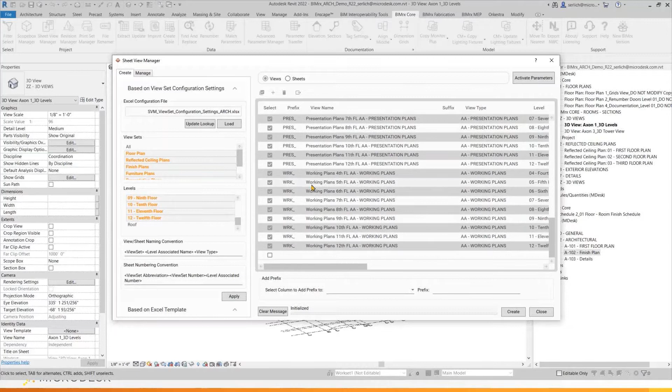Once we hit apply, we'll see that the data grid will update with all of that information. This will allow us to set up all our views, from the floor plans, the RCPs, furniture plans, and working plans. It is all done so easily. Lastly, we will select to create, and you'll see how in just a few seconds, a little over 50 plans have been created, and all that project setup is done for us.

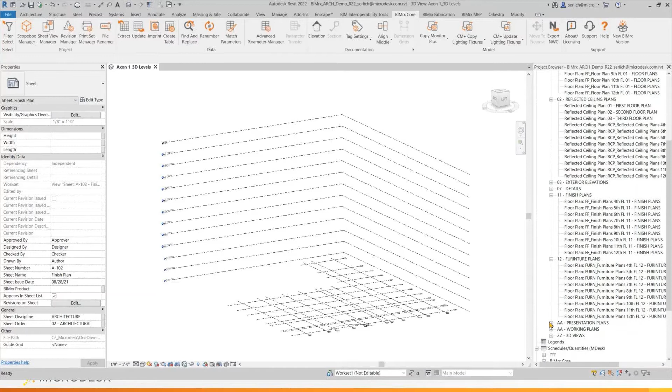You can see all the views that I now need are in my project browser. My floor plans, RCPs, finish plans, furniture plans, presentation plans, and working plans are all here. And now that we've set up all our project views, we can start to model all of the elements within our building.

Let's fast forward through time to a point when our building is modeled, just like that. I mean, I wish BIMrx had a button to do that, but we still need to model it ourselves. But once we have our modeling portion done, we can begin that tedious task of updating the data of our model elements. Managing data is such a repetitive process within Revit.

You must select each element and input all of that parametric information. And Revit makes this process a little bit easier by allowing us to create schedules, but it's still so tedious to update that data. Now, I just showed you how to create our views within our project utilizing Excel. But let's take a look at how we manage our parametric data.

The BIMrx extract and update features allow for round-trip data between Revit and Excel. Before I extract and update the elements, I must first select the elements I want. For this example, we want to update some room parameters, and we will use the BIMrx filter select to do just that. Here, we are able to easily select elements based off of our Revit rule-based filters.

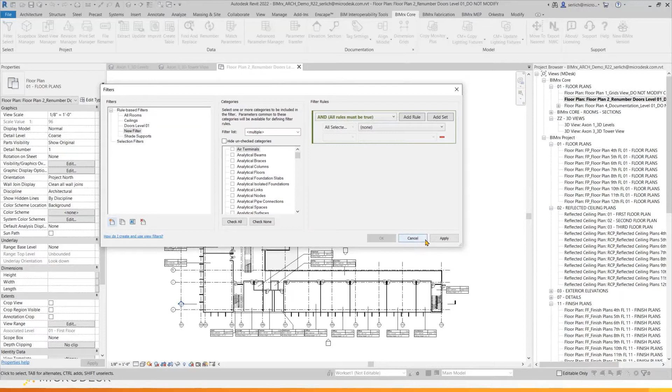This takes selecting elements to a whole new level. We can also access the Revit out-of-the-box filter dialog if we need to create new filters. Then we can set up our rule-based filters to select and hide, or select and isolate those elements.

Now, once we have our rooms selected, we can come over and use the BIMrx extract feature. With BIMrx extract, we can either extract a selection of elements or any pre-created Revit schedule. For this example, we will extract our selection.

When extracting a selection, we can now preview which parameters we want extracted right here. By default, it will export all parameters associated to the elements of my selection. But we can use our parameter filter, as you see, to specify which parameters we want extracted. With the parameter filter, we have the ability to really narrow down which specific parameters we want.

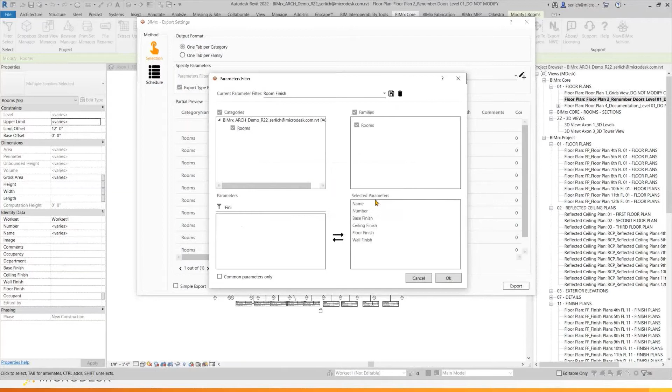And here we want to extract all our room names, numbers, and the different finishes. We can then save this filter to use at a later point in time. Once we save it, the preview will then update according to the changes that we have made. Once we are happy with this preview, we can select to create a simple export.

This will only export the type and instance parameters that we've specified. Then we can hit export. It'll prompt us to save the file. And then prompt me to open that file.

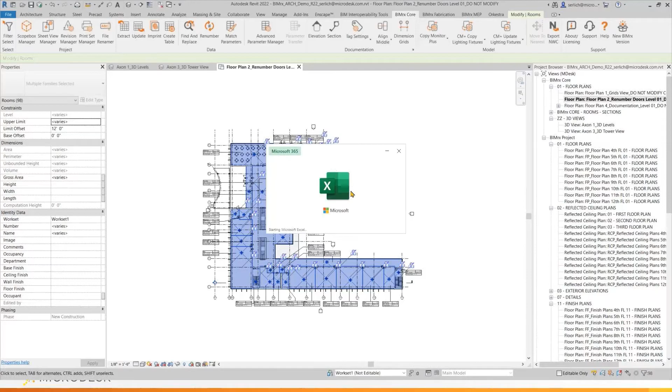Now, once that file is open, we can start inputting that information in. Now, in reality, we would probably take some time to make these changes more appropriate, but for the ease of this demo, let's just input some data.

Not only is this really easy for us Revit users to update the information, but now we can coordinate with non-Revit users alike. I'm certain that many of you have team members who aren't working in Revit. Well, now we can export this Excel file, hand it over to our consultants or other project team members who aren't in Revit. They can fill out the Excel file, bring it back to us, and we can easily bring it back into the Revit model.

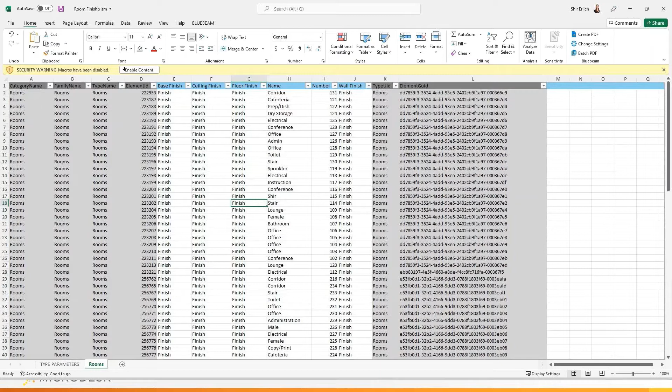All we have to do is save the file, come back to Revit. Let's open up first a schedule so we can see this data when it is updated. Now we can use our BIMrx update feature, select the correct Excel file, and simply hit update. And just like that, all our room data has been updated. It is so fast and easy.

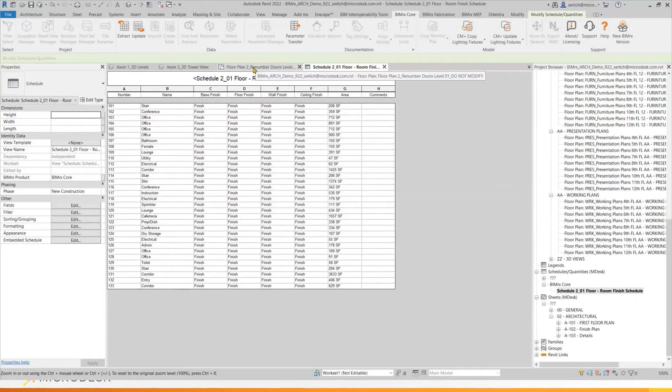Not only are there commands and features that work to update parametric information through Excel, but BIMrx has a few commands and features that work to update parameters directly within our Revit model. For example, we have our brand new match parameter feature that allows us to match instance parameters across different families or elements. The Revit out-of-the-box match parameter only matches types, but now with BIMrx, we can match instance parameters as well.

For example, I can add a value to the comments parameter in this furniture element, then select the BIMrx match parameter command. Simply select the element with the value that I want and all the elements that I want to match that value to.

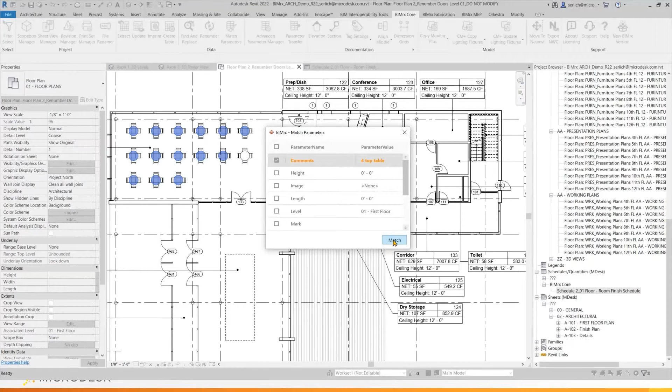Then I simply select which parameter I want to match and select match. Now all my elements will have the same value for that parameter. This makes copying values across different elements so easy.

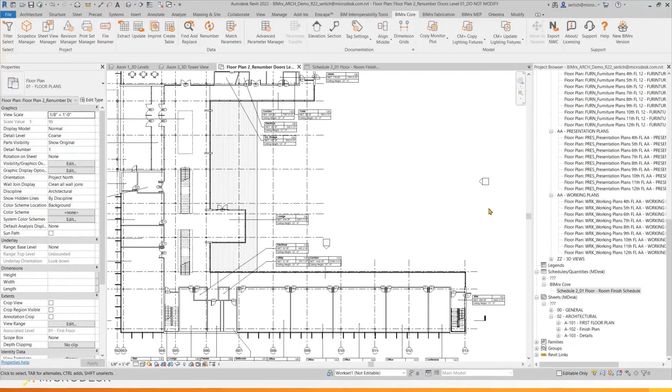Now that we've finished managing all of that data within the Revit model, let's take a look at how we use BIMx to create our documentation set. We went through project setup, we went through model management, and now we need to start that documentation process, right? Before we can document our drawings, we need to create all our sheets and place all of those drawings on their respective sheets. That's where the BIMx Sheet View Manager comes back into play.

You'll see here in my 3D view, I have 2 towers associated to my building. So we might also want to create some dependent views for the different towers from the overall plans that we've created earlier. I'm sure that you know duplicating as dependent our different sector plans is such a tedious task. We have to select each view, right-click to duplicate as dependent, repeat, repeat, repeat. Then we have to go back and rename all those views and then add all those scope boxes.

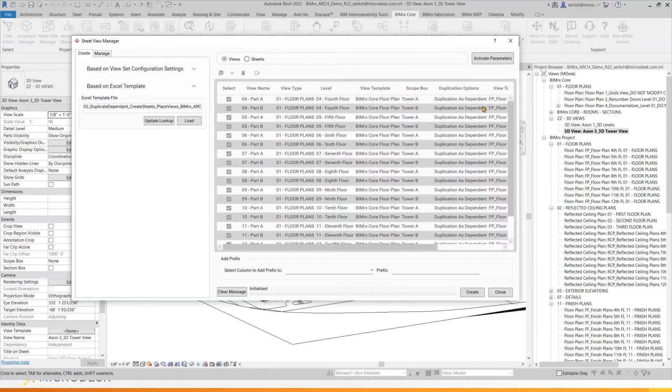Well, with the Sheet View Manager, we're able to streamline this entire process. All we have to do is load in that Excel file to create the dependent views for all those towers. The Excel includes that naming and the scope boxes for each dependent view. No longer do we have to waste time going back and renaming all those views and assigning those scope boxes. In just a few seconds, my views are created.

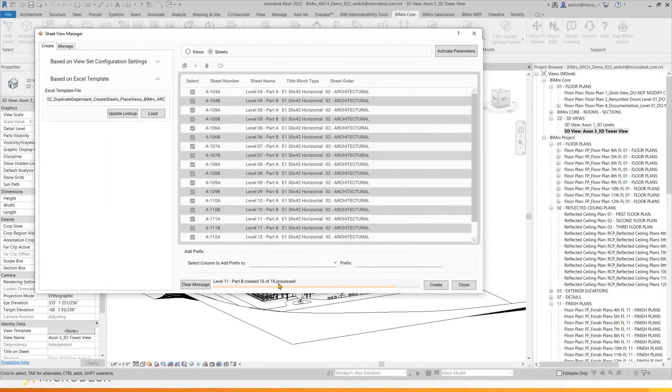Next, we have to create the sheets, right? The Excel file is already loaded in, so all we have to do is switch over to the Sheets tab and hit Create. And just like that, all the sheets have been created in our project. Let's go take a look at them in the project browser. There's my views, and there's my sheets.

Lastly, we have to place all those views on their respective sheets. And just like that, we will load in our Excel file. Before BIMx, we would have to open every single sheet, find the view, drag and drop it onto the sheet, and then they aren't even aligned. Well, with BIMx, we can select the sheet, the corresponding view, the view type, and even the placement location. We don't even have to open any sheet or view to do this.

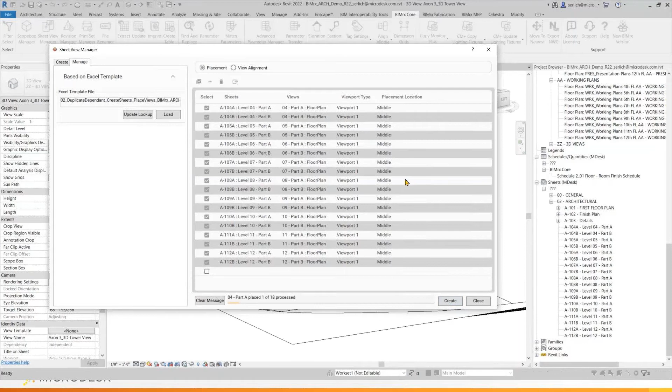With the BIMx Sheet View Manager, that is all done through that Excel-based workflow. You can see as we speak, those views are being placed and added to those sheets in the exact same location without us having to open a single sheet. And just like that, all my sheets are set up and those views are placed in the middle as I've specified them.

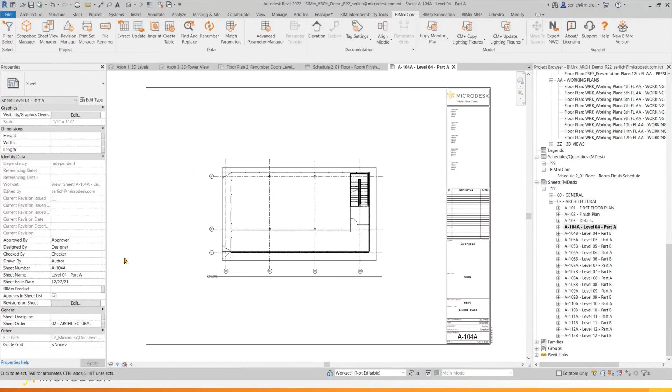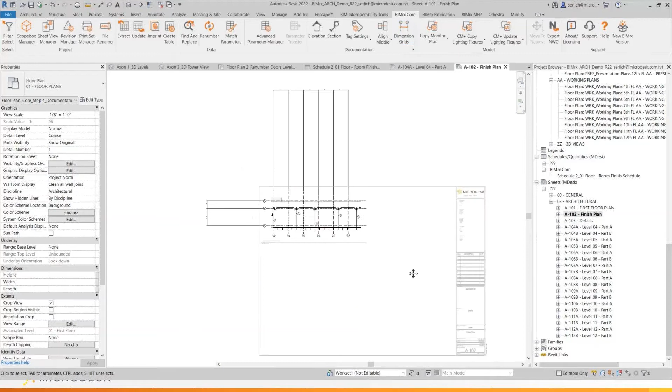Now that we have all our sheets and views created, we can start that documentation process. Adding dimension to our views can be really time consuming, right? Especially dimensioning our grids. The new BIMx dimension grid commands will automatically apply a dimension string between all grids in our views with one click of a button. Then all we have to do is move the dimension strings to the correct location. And once those dimensions are correctly located, we can move on to the next step, which is tagging.

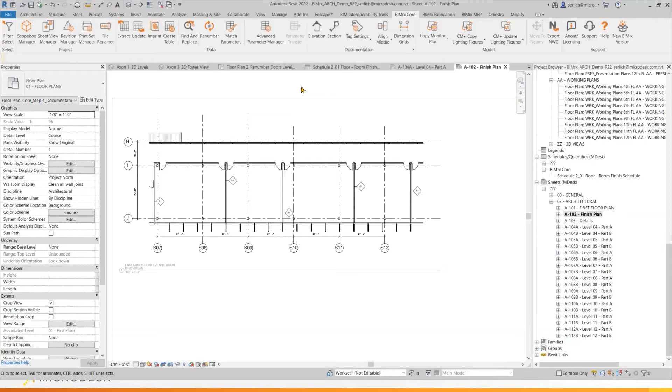We've done the hard work of updating all the data within those Revit elements in our model, but now we have to go and add those tags to show all of that information, because at the end of the day, we're delivering a set of drawings, right? The Revit out-of-the-box tagging method works okay to tag elements, but it's always placing tags in the center, and we end up spending so much time adjusting tag locations. Well, our tagging features solve those problems.

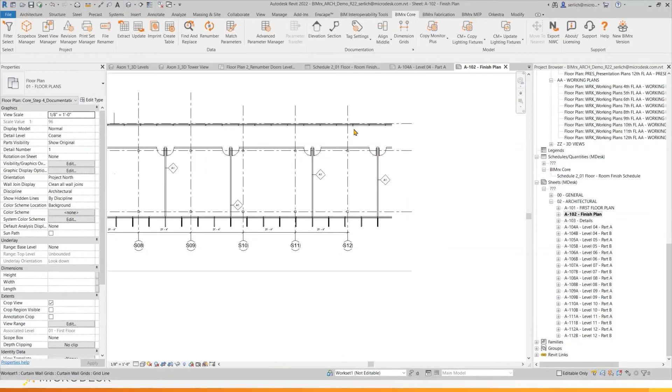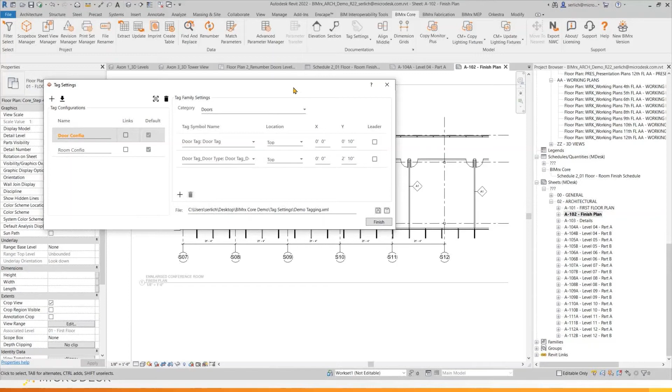We want to start with our tag settings because this is where we're going to set up all of our tag configurations. These tag configurations allow us to set up multiple tag symbols per category, specify location relative to our element, and then specify offsets relative to that location. We can even set up a default for every single one of our categories. And then we can even start tagging elements directly within our settings dialog just to make sure those tags are in the proper location.

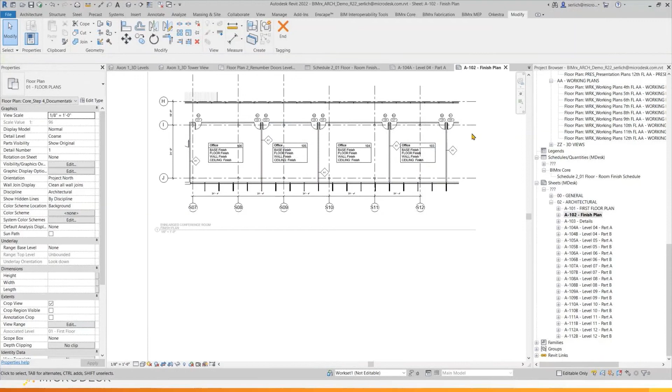Once we have our default configuration set up, we can use the tag select, which will now work like the out-of-the-box tag by category, but with our BIMrx tag settings. Here we can easily tag all of our doors and rooms. And we don't have to move them after the fact because they're right where we want them.

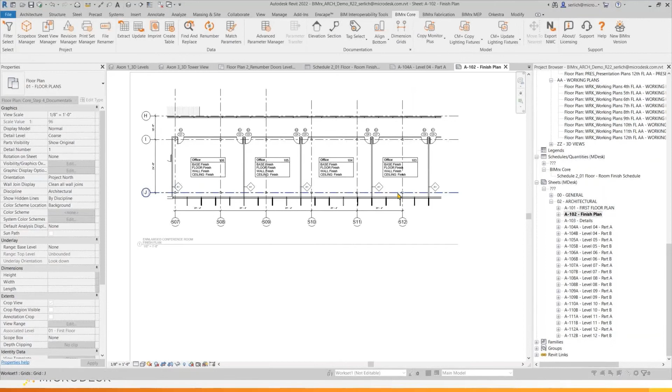But sometimes we have existing tags placed that may need to be aligned, and the new BIMrx Align command gives us a variety of alignment options for both tags and dimensions. For example, I can select to align all these wall tags to the bottom. Getting my drawings documented and cleaned up has never been easier than with BIMrx.

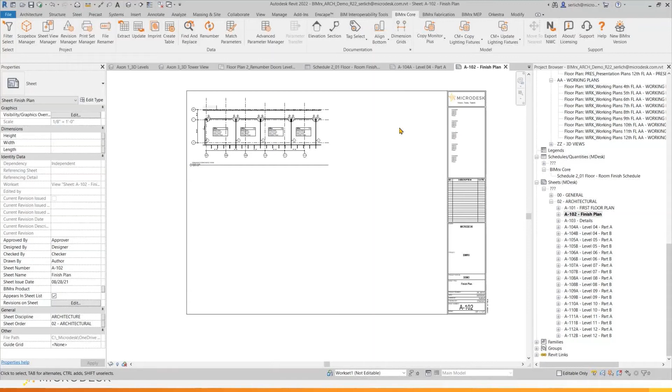Once we finish tagging all our elements, we may want to start incorporating non-Revit information into our documentation set. Now, I showed you how to utilize Excel to create views and sheets and even update parametric data. But what if we have Excel files or Word or PDFs like the Excel file that I have right here?

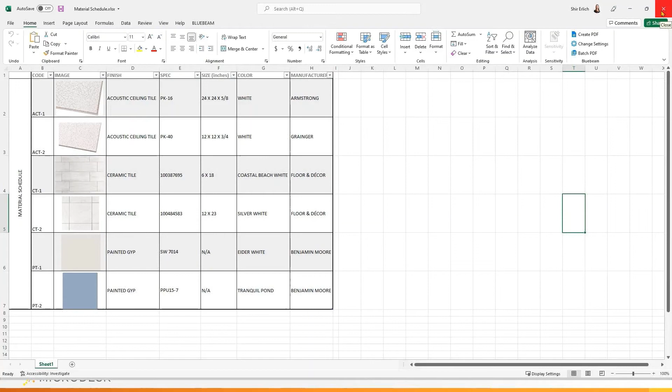Revit out of the box doesn't allow us to incorporate Excel files or Word files into Revit. But now with our BIMrx Imprint feature, we can do just that. We can incorporate Microsoft Excel, Word, or PDF files directly onto our Revit views and sheets.

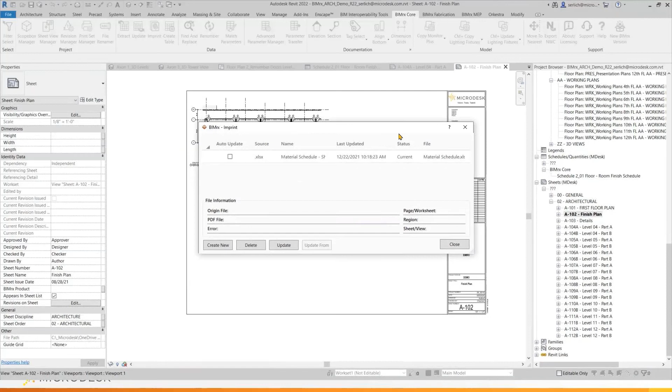Not only is this file imprinted, but this is a link. So if you modify those files at any point in time, it will be updated in the Revit model as well. As you can see, our imprint is successful, and now we can move it to any location.

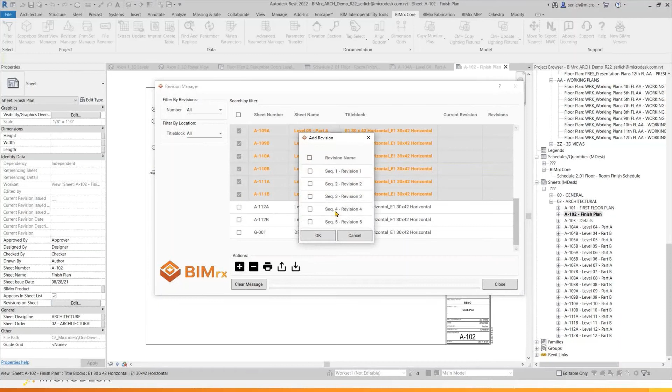Now that we finished adding everything to our documentation set, all our sheets are ready to go, we probably need to start finalizing those revisions and adding those revisions to our sheets. Well, that is where our BIMrx Revision Manager comes in. The BIMrx Revision Manager allows us to add multiple revisions, remove multiple revisions, and then create print sets of those revised sheets. I can easily select my sheets and specify one or many revisions to add to those sheets.

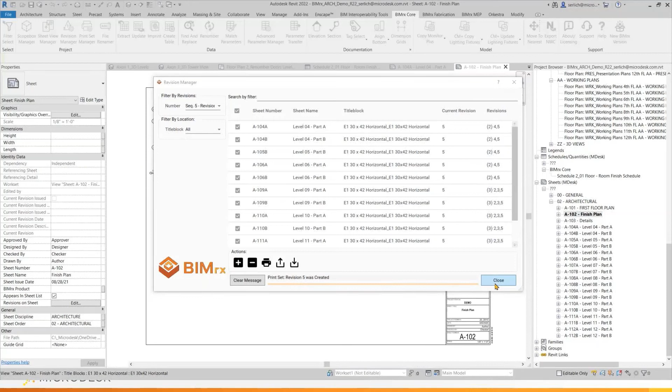Once we've added our revisions, we can use the intuitive filtering to filter by that revision, easily select all our sheets, and then create a print set of those sheets. The print set will then show up in my Revit out-of-the-box print manager. Or we can use the new BIMrx Print Set Manager to manage that print set.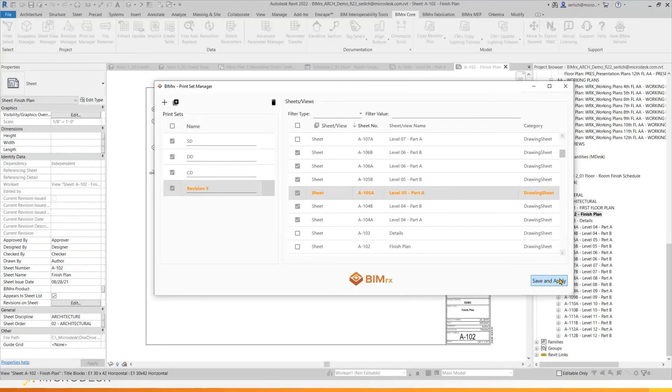We can easily create, duplicate, or delete print sets, filter by different view and sheet properties, and easily modify the views or sheets within that print set. Now, once we finish all our modifications, we can see those changes being applied when we go to the Revit out-of-the-box print manager. All I have to do is select Control P, and I'll pull up my Revit out-of-the-box print manager to see those print sets.

But wait, there is even more. One of the most amazing additions to BIMrx is the new release of BIMrx Cloud Manager 2.7. BIMrx Cloud Manager now integrates with BIMrx Core to allow for the export of PDFs and NWC files from the Revit model on a daily, weekly, or monthly basis.

Remember how I just showed you how to create print sets with BIMrx Core's Revision Manager and then manage those print sets with BIMrx Core's Print Set Manager? Well, now with BIMrx Cloud Manager Pro, we can take those print sets and automate the export of PDFs either on demand or on a schedule. This integration opens the possibilities for even more ways to automate your workflows like never before.

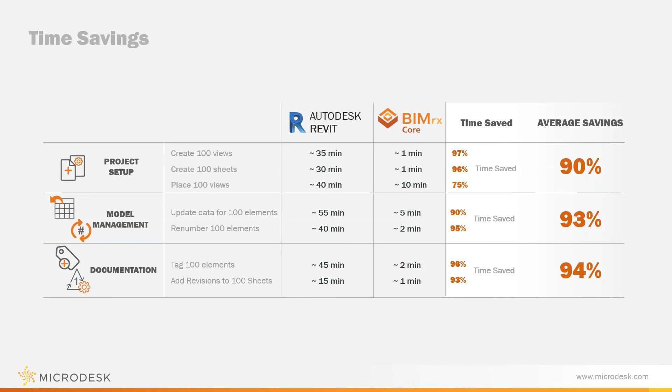BIMrx Core really includes even more incredible commands and features than what I got to show you today to automate project setup, model management, and documentation, allowing for tons of ways to speed up your workflows. I'm certain that you would benefit from not just one, but many of the features listed here, and I hope you got just a small taste of what BIMrx Core could do for your project teams.